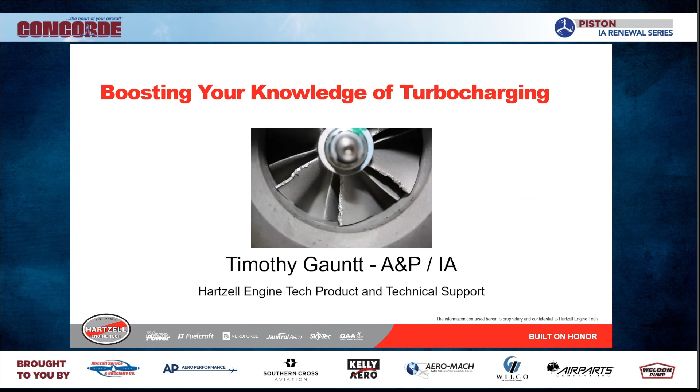My name is Tim Gaunt. I am an A&P IA, and I am part of the Hartzell Engine Tech Product and Technical Support Group.

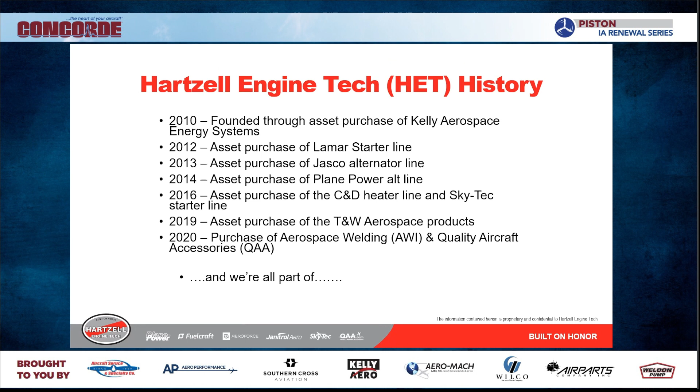A little history on Hartzell Engine Tech. We were founded in 2010 when the parent company for Hartzell Propeller purchased the assets of Kelly Aerospace Energy Systems. Since 2010, we've added several different companies between Lamar, Jasco, Plane Power, and C&D. We also added T&W Aerospace. Then in 2020 we added Aerospace Welding, AWI and AMI, and Quality Aircraft Accessories, located in Tulsa, Oklahoma. We are all part of the new brand of Hartzell Aviation.

We took the company here just at this past Oshkosh, and we went ahead and broke the company into three major divisions: Hartzell Propeller, Hartzell Engine Tech, which is us, and Hartzell Aerospace Welding, all under the Hartzell Aviation banner.

Some of the product lines we actually have at HET include the Aeroforce turbochargers, Plane Power alternators, Sky-Tec starters, Janitrol aero heaters, Fuelcraft fuel pumps, and Quality Aircraft Accessories, which is considered a brand under the HET product line. It can get a little confusing because all of the alternators, no matter what we manufacture, are considered Plane Power. So the days of Prestolite and Ford and Chrysler and all that are gone.

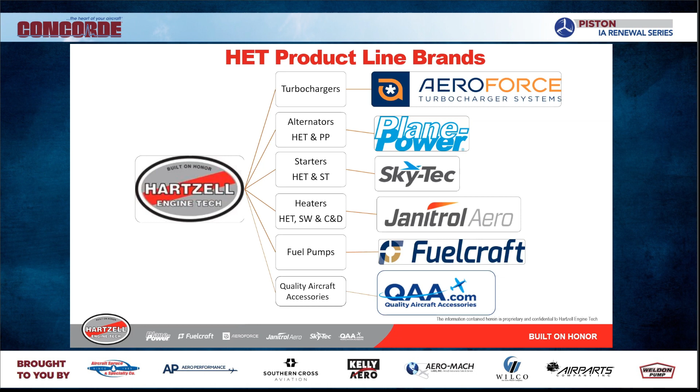Home base is in Montgomery, Alabama, and that is wintertime for us, for some of you that might be out there actually suffering from wintertime. We do have aftermarket and OE support. On the technical support side we have Allen Buffkin, Jacki Gillund, and Seth White. On the sales side we have John Heitland, Rodney Arnold, and Wade Hill. I wanted you all to know that we have technical expertise on our products in that we have 3 A&Ps, 2 IAs, 2 pilots, and 2 retired military, which you know how they are.

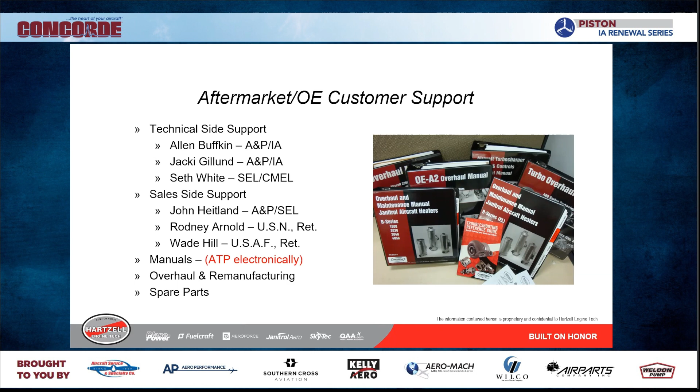All of our manuals that are published are available electronically through Aircraft Technical Publishers. The turbocharger manuals and the valves and control manuals are available through ATP by subscription, electronically. We also have what we call RSFs.

This is a recommended service facility for HET, and it's for all the turbocharger related components. What's good about the RSFs is that they are required to carry product liability insurance, and they are authorized to perform warranty evaluation and repairs. This is important because we'll get a lot of calls from folks that say, I have a turbocharger that's leaking. Well, for those of us who have been dealing with turbochargers for years, we know that there's no true oil seal in any of the 400 series turbochargers, which means they are going to leak.

So you got to be real careful about saying you have a leaking turbocharger. But if that's the way it is, it can be sent into one of our RSFs, and that RSF can take that turbocharger apart, verify there's no problem with materials or workmanship, put it back together, and charge you a nominal fee for that inspection.

If you send it here to the factory, good luck. It's going to be a while before we get to it. If we take it apart and find nothing wrong, warranty is going to be denied and you're going to get the thing back in pieces.

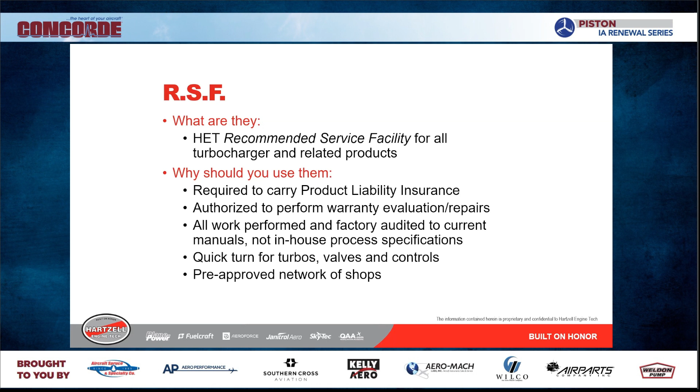Another advantage to an RSF is all the work is performed and factory audited to current manuals. Nobody's using in-house specifications. Pretty quick turn on turbos, valves, and controls. You can work that out with the shop, and they're a pre-approved network of shops.

Those shops are, of course, we have Quality Aircraft Accessories. Obviously, we own them, so that's logical. They're in Tulsa, Oklahoma, and Fort Lauderdale, Florida. We have Aero Recip in Manitoba, Canada. We have Approved Turbo Components down in Vero Beach, Florida, and Main Turbo Systems out in Visalia, California.

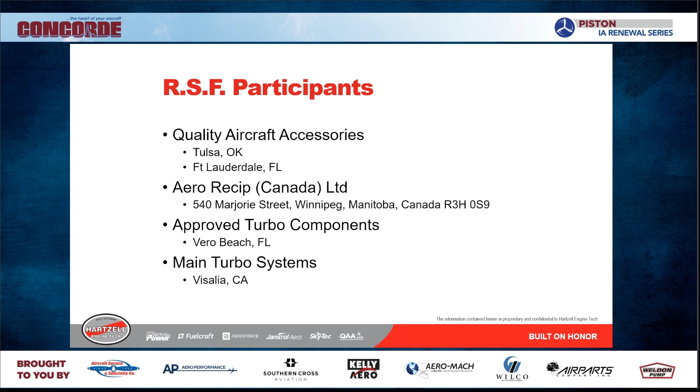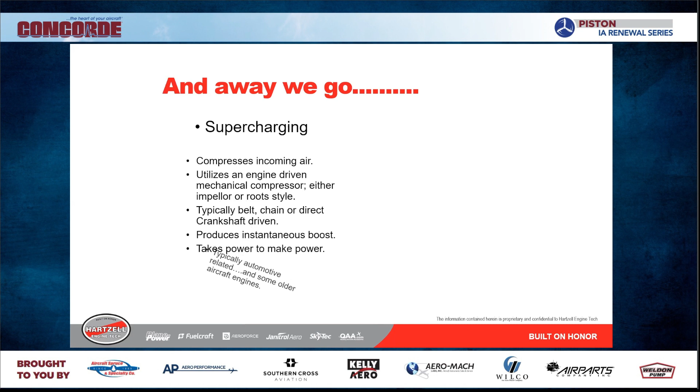All right, away we go. You know, you got two ways of doing this. You've got supercharging and you have turbocharging. Both allow you to push air into the engine more so than what's available on a standard day.

The whole idea is how you're going to get it there and what's the best way for an aircraft to do it. A lot of the old aircraft were supercharged. They did have impellers right on the big radial engines on the back of the crankshaft. They even had it on some of the geared old GO-435s and 480s, which were GSO - geared, supercharged, opposed engines.

But as time went on, the airplanes got smaller. It got harder to make a supercharger that would actually work conveniently. So we went to turbocharging because you got the turbo, you got the exhaust system right there. You can pull the power from that exhaust, extract that heat energy, spin a turbine wheel, which spins a compressor wheel, compress the air coming in and send it on into the engine itself.

So it was kind of free power. It was already there anyway. You already got the exhaust. Think about the efficiency - typical recip engine is about 33 to 35% efficient, which means you're dumping a lot of heat, a lot of exhaust, a lot of energy right out the exhaust pipe. We turbocharge it, probably comes up all the way to 42%. So we still got a lot of heat going overboard, as you all know if you've seen the exhaust.

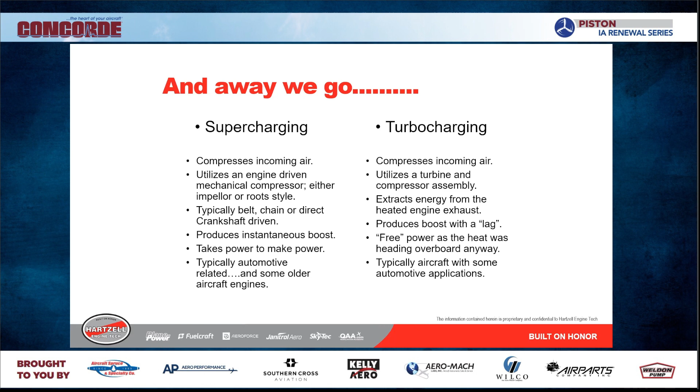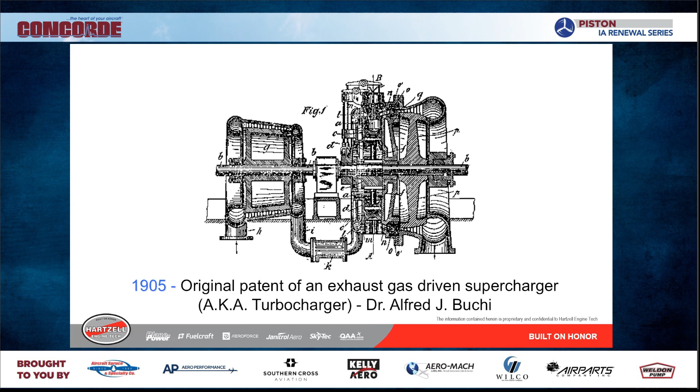Original patent on an exhaust gas driven supercharger, aka a turbocharger, was by Dr. Alfred J. Buchi in 1905. Dr. Buchi was the chief engineer for the Sulzer brothers, which of course is when it was designed.

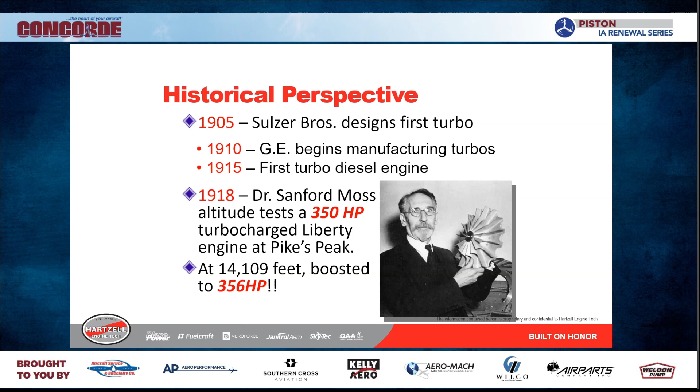GE got involved. The first turbo diesel engine was manufactured in 1915. And in 1918, Dr. Sanford Moss actually took a turbocharger on a Liberty engine, which was rated at sea level at 350 horsepower. He took it up to Pike's Peak and he boosted that engine to 356 horsepower. What that did is it proved that the turbocharging theory was correct - that you could maintain or increase a sea level rated engine's power at altitude, which is the whole basis of what we're doing today.

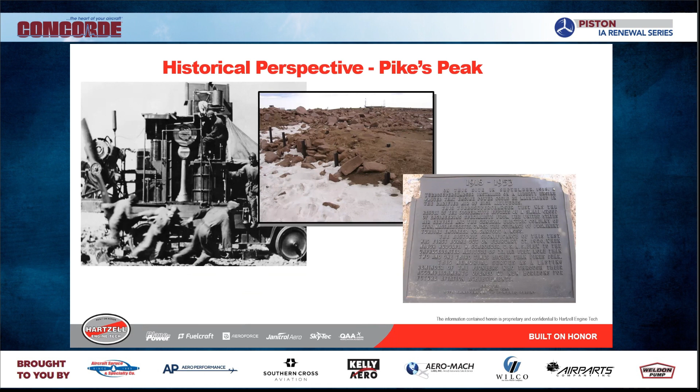Kind of an interesting thing. It talks about the history of it and how we got to the point we were at. This dude, Major Rudolph Schroeder, in 1920, took a LePere biplane - it was a 12-cylinder turbocharged Liberty engine - and he took it up to 33,000 feet.

And when he lost consciousness, the airplane was out of control, and his eyeballs froze as he came down into altitude. Apparently, he recovered to make a beautiful landing to complete the flight.

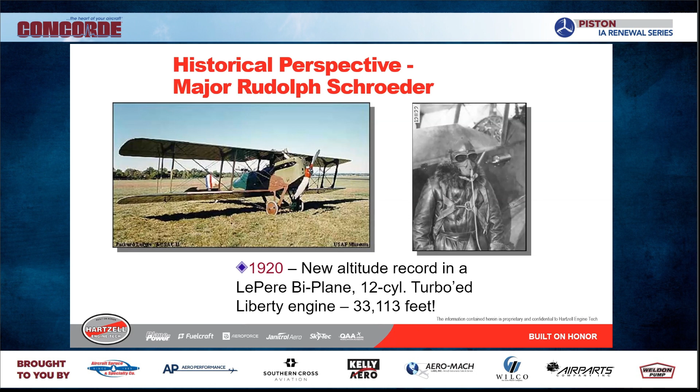Now, if we didn't think there was a lot of sensationalism in the news media today, they were just as rampant as they were back then.

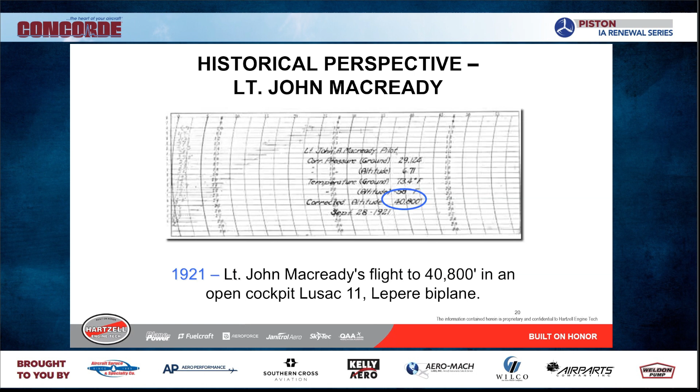And then this other gentleman, Lieutenant John Macready, he actually took the same type of airplane and flew it to 40,800 feet. Gentlemen and ladies, this is not a video game. This is when men were men. So why do we turbocharge an engine?

Well, power diminishes with an increase in altitude, I think about an inch per 1,000 feet. We turbocharge to gain more power and increase engine efficiency, without having to physically enlarge the power plant.

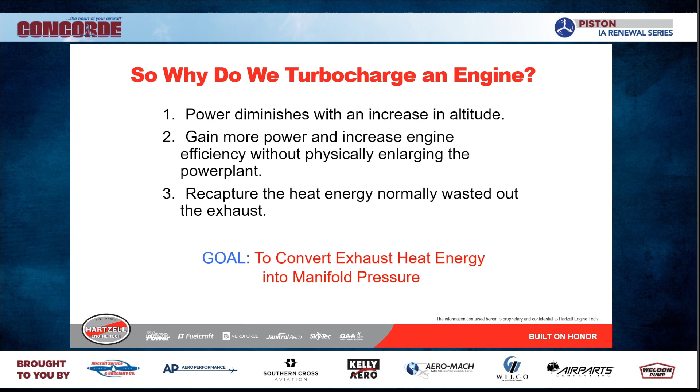We're going to recapture that heat energy normally wasted out the exhaust. Basically, we just want to convert exhaust heat energy into manifold pressure. We can take a little bitty engine and make it think that it's a lot bigger than what it actually is by turbocharging. It pushes more air into the engine.

You've got 5 basic system components: a turbocharger, controller, wastegate, pressure relief valve, and intercooler. The turbocharger is just the air pump. The controller is considered the brains. Now remember, this is not a computerized system.

We saw that it was patented in 1905. In 1905, there were no computers around that I know of anyway, so every one of these is a mechanical, hydromechanical device. They just use different air pressures to determine what the position of things are going to be.

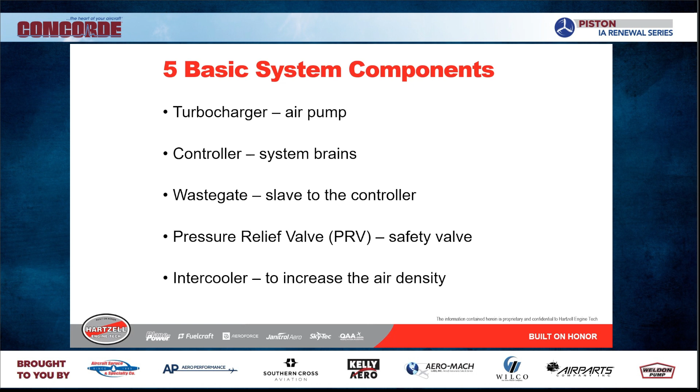So the controller is the brains of the system. The controller controls the wastegate, which is a slave to that controller. The pressure relief valve is nothing more than a safety valve, so you don't blow the engine up. And an intercooler just increases the air density, which we'll talk about in a minute.

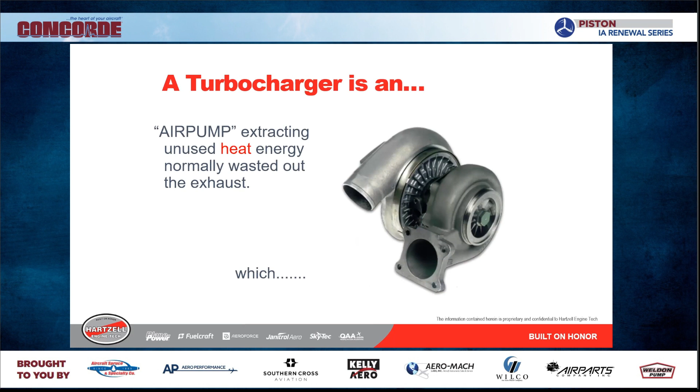So if we go to the turbocharger itself, it's nothing but an air pump. It just extracts unused heat energy, normally wasted out the exhaust. If we look at the way the air is routed and the exhaust is routed through it, you'll see the exhaust coming up through the turbine side, comes around the scroll, turns the compressor wheel from the turbine wheel, sucks air into it, pressurizes it, and sends it out into the upper deck and manifold pressure.

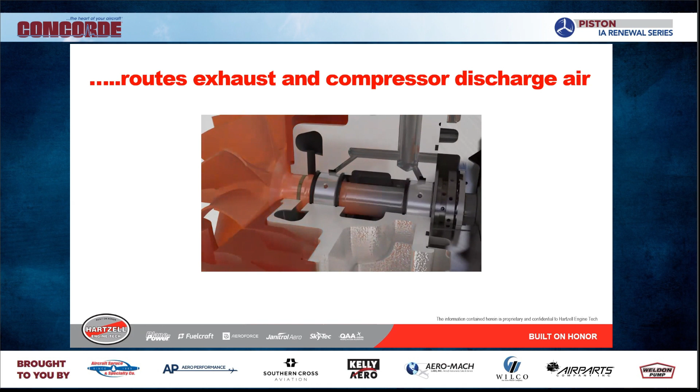Now watch what happens when this thing enlarges. You're going to see the heat signature from the turbo side coming all the way across through that bearing on the left-hand side. That bearing is the one that has the little hole in it. Now, that bearing, if it is not properly lubricated by you shutting off the engine too quickly, is going to coke that oil that's right in that bearing.

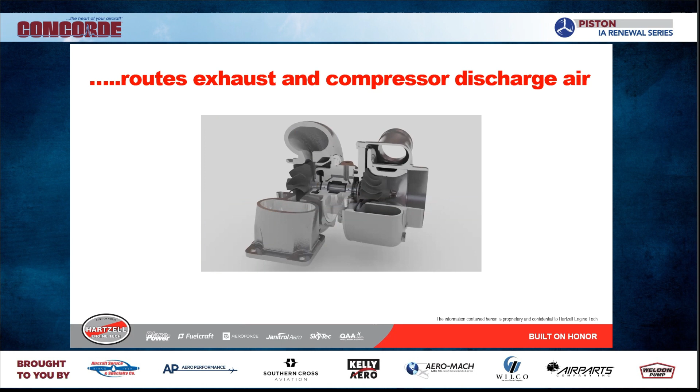And by coking that oil, you're going to squeeze or keep that little piston ring that's in there from actually preventing the oil from going out, because the air pressure won't have anything to push against. And it's going to let you have a leaker on this thing. So it's very important to have proper cool down, which we're going to talk about later.

Cold side materials are aluminum. Basically, the compressor side is going to be aluminum. The hot side or the exhaust side is going to be Inconel or stainless steel. We're going to be looking at temperatures of approximately 1,650 degrees Fahrenheit. And these turbochargers are going to turn up to about 125,000 RPM. Small ones are going to be the 125, larger ones, let's say 90,000 RPM.

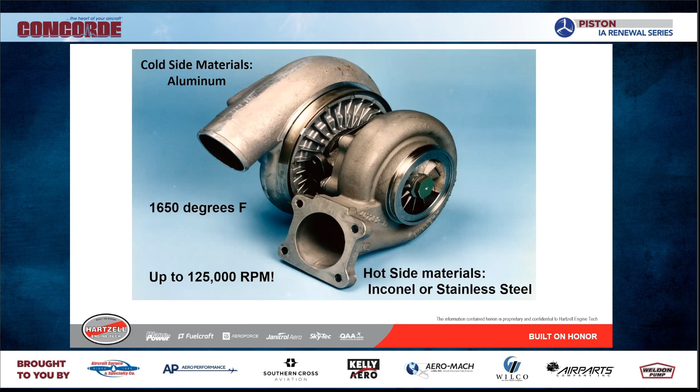Different models of turbochargers: we have the old Rajay style, which is what we consider our CF600 series. The Rajay company, if any of you have ever been involved with them, turbocharged almost anything that existed between airplanes, cars, tractors, boats. It didn't matter. They'd stick a turbocharger on it.

It was easy for them to do because the majority of their systems are what's called a normalized system, in that they are not trying to increase the rated output of the engine. They're just trying to maintain that rated output when they go to altitude. So it wasn't like you had to have a super engine or had to do anything to the engine to put a Rajay on.

The Garrett turbochargers, the TA04s, that'd be something like what's on a Cirrus or a Malibu. The Garrett TE06 style would be more like on a Navajo, and a TH08 would be something like a 421, 414 that has a pressurized cabin, because they pull a little sonic venturi on it to pull your air out, which should show you that you have plenty of air.

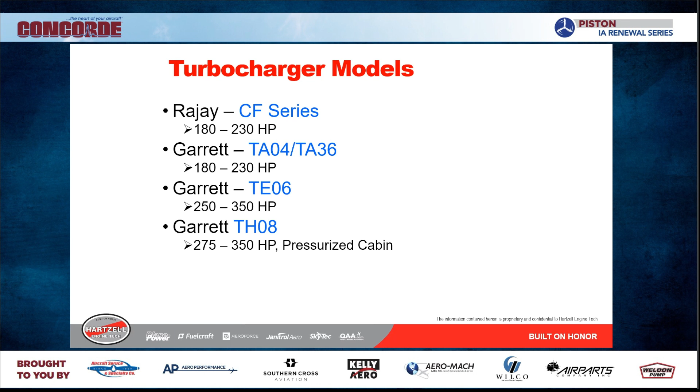You have enough air coming from a turbocharger, not only to keep the engine at whatever it's supposed to be power-wise, but also to pressurize a cabin. So you've got a lot of air coming through this thing.

Turbocharger terminology: boosted, horsepower increase. The best way to look at this is on a normalized engine. If you have a standard day, 29.92 inches, 1013 millibars, 59 degrees Fahrenheit, whatever, that engine's going to give you X horsepower and X manifold pressure. Never going to be exactly 29.92, but for sake of argument, we'll say 29.92.

So a normalized system is going to take that 29.92 rated horsepower and take it up to altitude, whatever the capability of that turbocharger and the engine are. A boosted engine is going to take the 29.92 and boost it. So instead of having 29 inches of manifold pressure, you could have 31, 45 inches of manifold pressure.

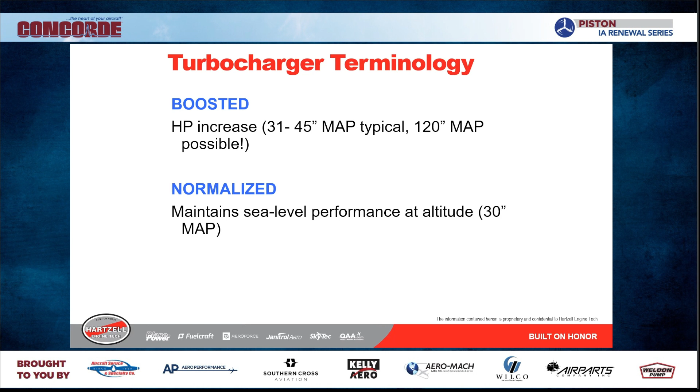Though a lot of the race airplanes and the old warbirds would pull 120 inches of manifold pressure. Think about that, that's 4 times atmospheric. So I don't think we were too concerned there about durability and reliability. It was probably just trying to get somebody, because they were on your butt with a machine gun and you really kind of needed to get out of there.

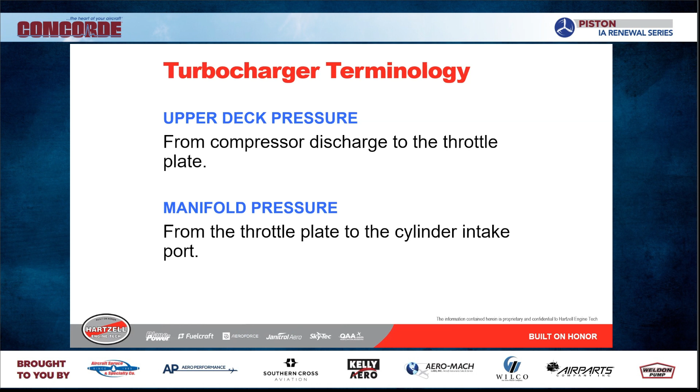Upper deck pressure is physically from the compressor discharge to the throttle plate. Manifold pressure is from the throttle plate to the cylinder intake port. So you kind of split those up. The reason we do that is because the controllers use both of these air pressures to determine the position of the pilot valve in the controller, to position the wastegate to allow a certain amount of air to go over the turbocharger itself.

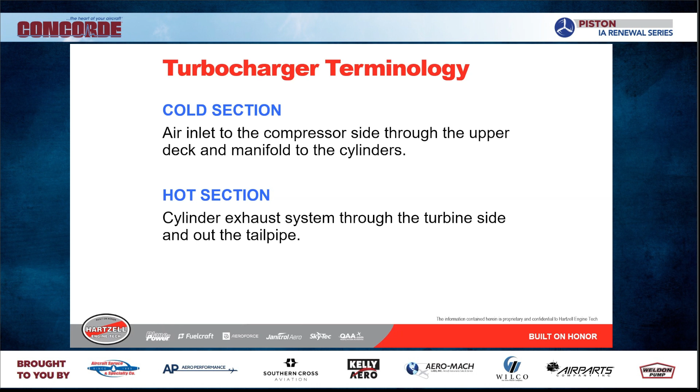Cold section and hot section. Hope you don't need any help with this one, should be pretty obvious. The cold section is on the air inlet side, to the compressor side, through the upper deck and manifold to the cylinders. The hot side is the exhaust. If you have a hard time trying to figure out what the hot side is, just run the engine, go out and stick your hand on the turbocharger. You'll figure out real quick which the hot side is.

So if you're thinking about it, if we said that a turbocharger could rotate at 90,000 RPM, that means the bearings themselves are rotating between 30 and 45,000 RPM. Probably a pretty good reason to keep some oil going through this thing anytime that turbocharger is online.

Piston rings, they use little piston rings, not unlike a cylinder ring. They're a little ring that goes on either side of the shaft, between the shaft itself and the housing and the bearing housing, and they're not oil retention seals. What they're actually used for is the gas pressure from the exhaust side and the gas pressure from the compressor side push in, trying to get into the center housing, into that bearing housing. Well, we don't want those contaminants in there from that exhaust air and that type.

So what we use is these rings. The gas pressures push on these rings and they help seal the gas pressures out, and that's what actually keeps the oil in the center housing itself. That's why you might have a situation sometime where a guy says it's leaking or something like that. It's very possible it could leak because there's nothing there. There's no true seal in a turbocharger to prevent the oil from leaking.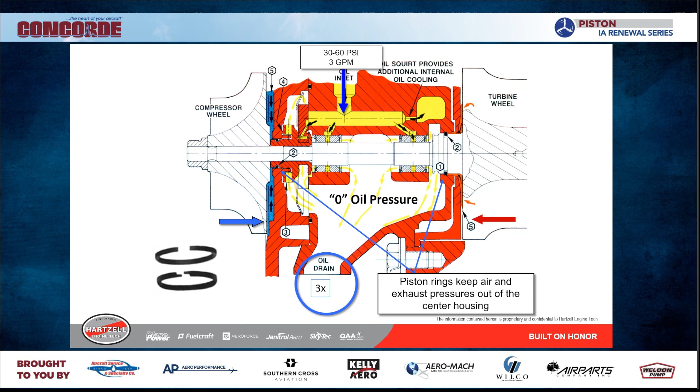We now have a restriction downstream, which is the bearings and the turbine wheel shaft assembly. But once the oil goes through that, there's nothing there. So we have no oil pressure in the bottom of that center housing, which means we have to have a large outlet. Notice the oil drain is about 3 times the size of the oil inlet. And in many cases, we're going to have a scavenge pump attached to make sure we evacuate all the oil out of that center housing, or you will have a leak.

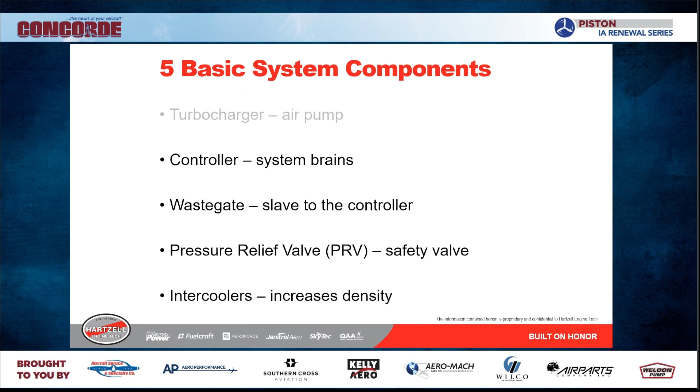Let's go back to our system components. We had the turbocharger, the controller, the wastegate, PRV, and the intercoolers. Turbocharger's gone. Let's talk about the controller.

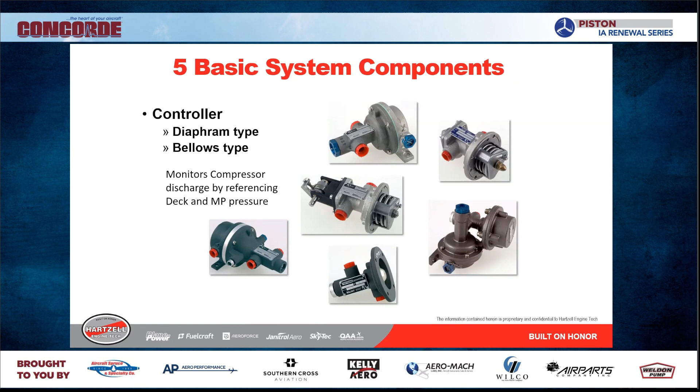Different controllers, there's all kinds of different pictures of them. Remember, the controllers to us as a manufacturer, what we see is what the engine manufacturer, the airframe manufacturer want. They tell us, hey, we want an engine that has this much horsepower. It's going to be a 6-cylinder. We're going to turbocharge it. We want this manifold pressure. What do we need to put on there to give us those parameters? And then we just take the basic components and put them together, whatever would be best for them.

You have different types of controls. You have APCs that only control maximum manifold pressure. VAPCs, which control max manifold pressure and part throttle operation. Density and differential controllers, like you'd see on a Navajo, have the density controlling the maximum and the differential controlling the part throttle. Slope controllers are basically a combination of a density and differential controller all in one.

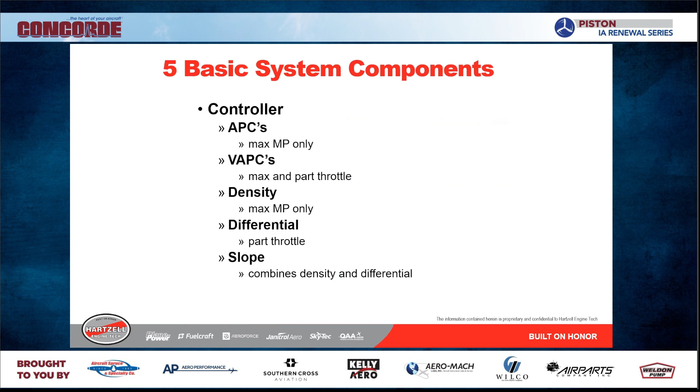Wastegates. Wastegates are just like they say: hydraulic, fixed, poppet, or mechanical. Most of the ones you're going to see on the airplanes are going to be in the picture on the top, the top one there. They're a hydraulic wastegate. They've got a little valve assembly in them. You basically have a hydraulic cylinder that moves that flapper on the inside there to route exhaust into the turbocharger or overboard. Now, the position of that valve is controlled by the controller.

You have a poppet valve in the controller, and what that poppet valve references, say on a slope controller, is upper deck pressure on one side and manifold pressure on the other. And it schedules oil releasing from the wastegate, which allows either the oil pressure to build up in the wastegate or to be released, and the pressure decreases, which allows the valve itself to open.

Fixed wastegates would be something like on the old Senecas with the TSIO 360 engines, where they had a little screw valve inside there, and that little valve, you'd get in there and have to adjust it. Very susceptible to overboosting on cold days. You had to really watch your manifold pressure closely. And then if you get some dummy like me that went to adjust it for the first time and didn't pay attention to anything, it looked like a loose screw, so I just screwed it all the way in. Well, obviously that isn't correct. Obviously there was probably an approved manual out there to tell me how to do that.

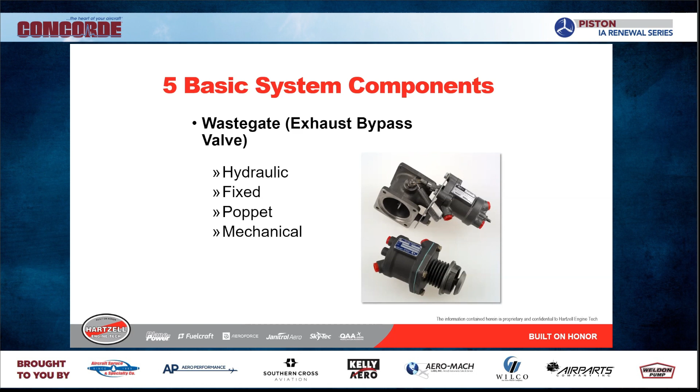Pressure relief valve. Just what it says, it's a fail-safe valve usually set about 2 inches greater than the maximum manifold pressure of the engine. If the manifold pressure exceeds that limit, it'll open up and relieve the pressure in the manifold itself, literally, so you don't blow the engine up.

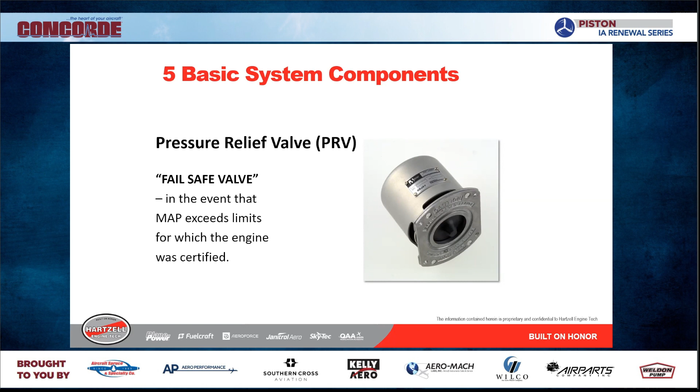It kind of sounds like an old Jake brake on a truck, where it goes pop, pop, pop, pop. You'll hear that thing popping as it opens and closes to maintain that pressure. It should never be the controlling factor. If a pressure relief valve is actually controlling, either there's something wrong with the PRV and it's weak, or there's something wrong with your control system on the turbocharger itself.

And finally, intercoolers. About 10 or 15 years ago, a couple of companies came up with intercooler kits, and they put them on a lot of the 210 series aircraft and the big Bonanzas and things like that. They can't say they're going to give you more power, but what they did say was they could increase your altitude.

Because when you have a turbocharger, the higher you get in altitude, the harder it's having to work to compress the air, and the harder it has to work, the hotter it gets. If you get it too hot and push it into the cylinder, you are looking at detonation. So that's what limits your altitude on most turbocharged engines - nothing to do with what the turbocharger could actually provide, but how much heat is being generated so as not to cause damage to the engine.

So we come up with an intercooler. The intercooler itself cools that air charge going into the cylinder, dropping the temperature after it comes from the compressor, before it goes into the cylinder itself, and you can run at a higher altitude because you don't reach your temperature limits. Remember, it can't change the certification of the engine - what it can do is help it get there.

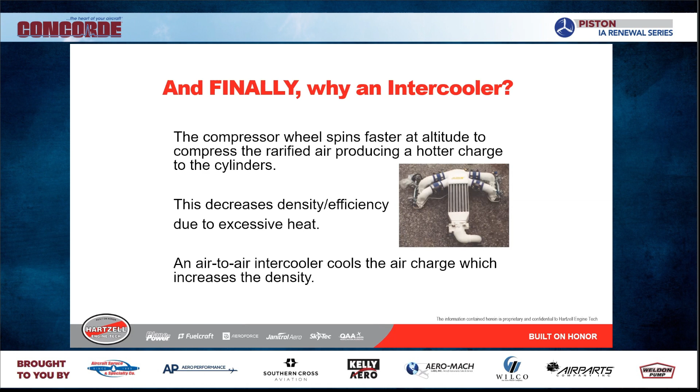The turbocharger is sensitive to insufficient lubrication, contaminated lubricants, foreign object damage, and of course extreme temperatures. Let's take a look at some of those.

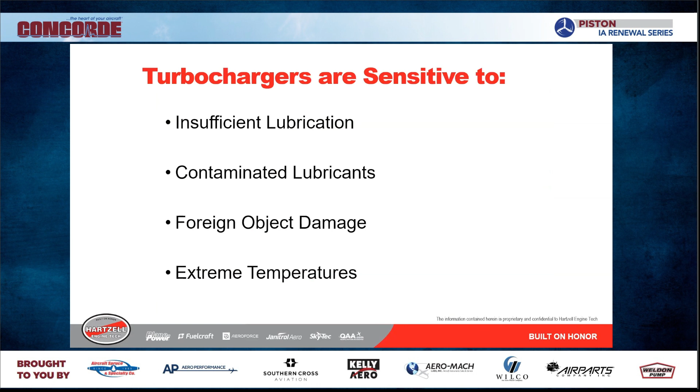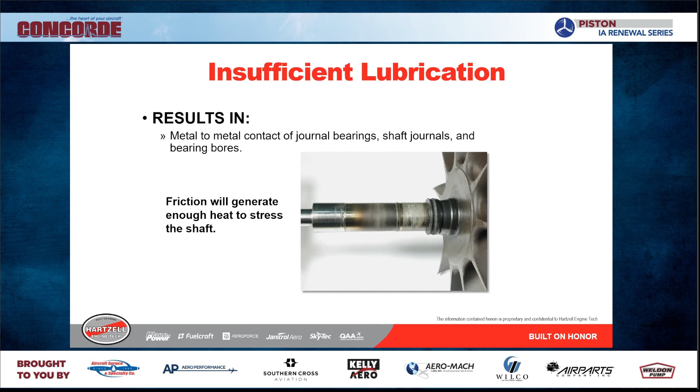So here's insufficient lubrication - you've got enough friction. You can't really tell on this shaft from the picture, but this shaft is actually blue. You can kind of see it on the left-hand side of the shaft itself, but on the right-hand side you see some white that looks like aluminum. That's aluminum galling, where the aluminum material has transferred from the aluminum bearing onto the steel shaft itself. It did that because there was enough friction, created enough heat, and it stressed that portion of the shaft.

When you have insufficient lubrication on a bearing like that, especially a plain aluminum bearing, you're going to tear out some of the material inside of the bearing. When that happens, instead of the bearing spinning freely, you're going to get an orbital motion - whoop, whoop, whoop, whoop. As it turns like that, the shaft's going to start to flex. When the shaft starts to flex, it's going to move the wheels, and as the wheels start to move, they're finally going to contact the housing, and you're going to destroy the turbocharger itself.

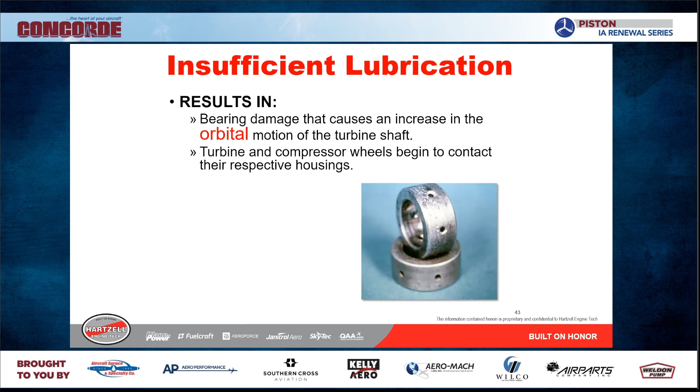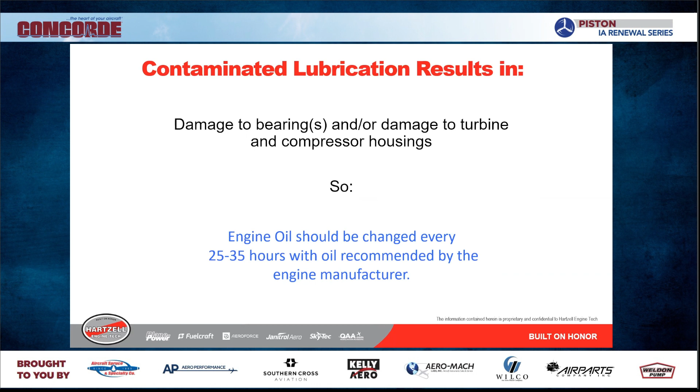Damage to bearings and turbochargers - we recommend oil changes at 25 to 35 hours, and that's what the manufacturers go by. We don't care what kind of oil you use, Phillips or Aeroshell, whatever you like. Whatever's approved by the manufacturers is what we have to approve for the turbocharger, because logically there wouldn't be any other way to do it.

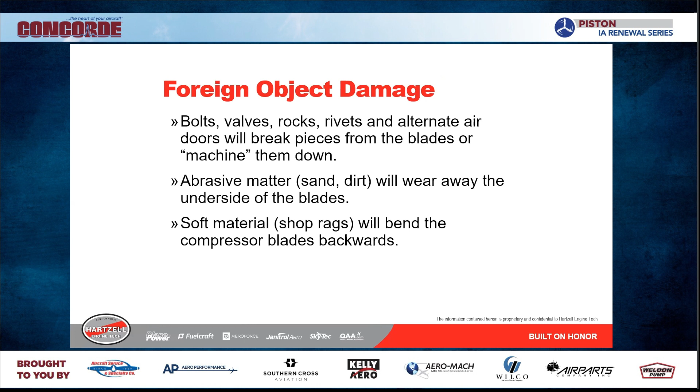Foreign object damage - bolts, valves, rocks, rivets, alternate air doors will break pieces from the blades or machine them down. I have seen everything you see on this screen, I've seen inside a turbocharger. These things come back and they're actually damaged, and the next thing is to determine how that happened. So let's look at a couple.

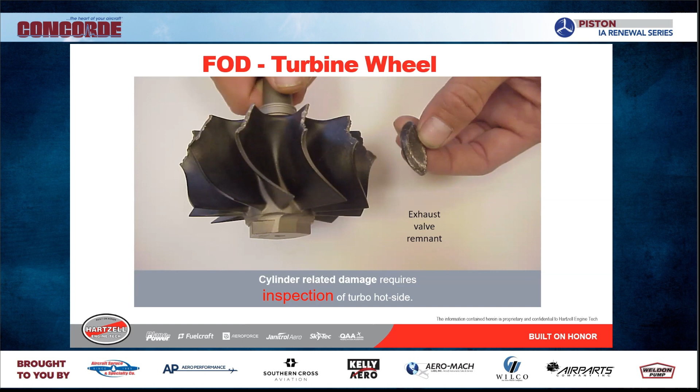Now the next important thing is, if you have something like that, where does all that FOD go? Think about it - that FOD's going up into the upper deck, and maybe if you're lucky it comes out of the compressor and goes into the intercooler and gets captured there. Otherwise, and maybe even so, it goes on into the engine cylinders, and now you've got these pieces of aluminum coming off that wheel bouncing around inside the cylinder. So we have to recommend that anytime you have damage like this on a compressor wheel, you also bore scope the engine to make sure you don't have any internal damage on the engine itself.

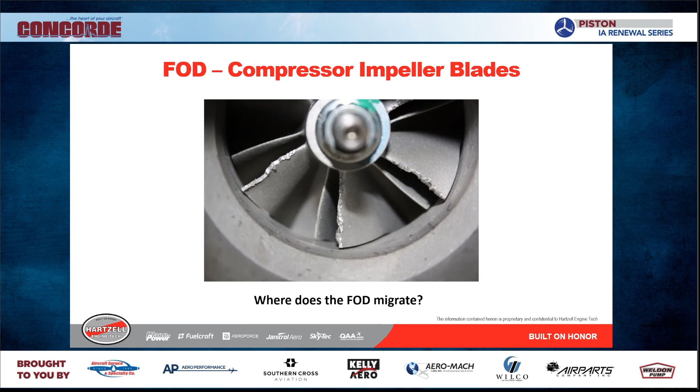Just a side note - the nut that's right in the center of that turbine wheel assembly on the compressor side, we are now slowly changing those nuts over so they are reverse rotation. Because if that thing is turning at 90,000 RPM and something tries to stop that wheel, the wheel is going to stop but the shaft will keep moving, and that would loosen that nut. The nut would come off and go down into the system itself. So by using reverse threads, like an old Chrysler wheel lug, it can't do that anymore.

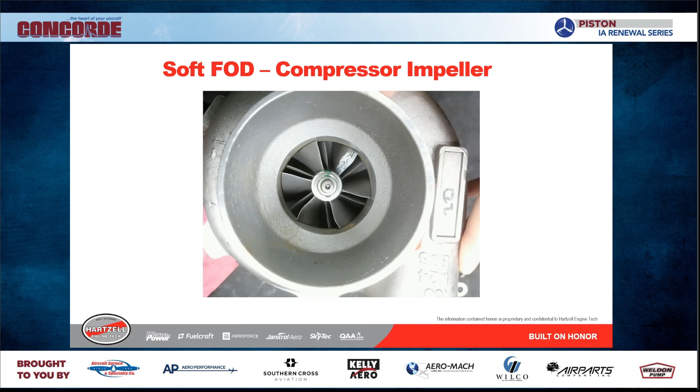Now, you've seen this damage on these compressor wheels - the first one and now this one - there are no repairs on any of this. Once you've bent one or gotten nicks or something in a blade, you are replacing that wheel. You cannot repair it; there's no blending or anything like that that you're allowed to do.

Here's some FOD that was left in here. Notice that yellow cap plug, right in the middle of the screen there. That cap plug basically was put in the oil inlet of the turbocharger center housing to prevent contamination. The theory is you're supposed to take that cap plug out when you put the fitting on. In this case, that did not happen. The cap plug ended up inside the center housing, blocking the oil outlet.

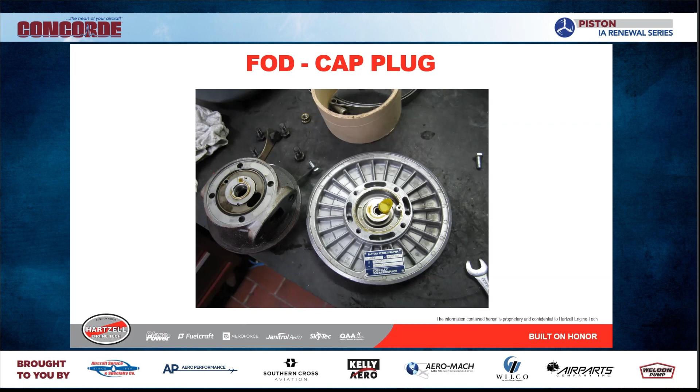When it blocked the oil outlet, it allowed that turbocharger center housing to fill up with oil, which just pushed it overboard because there was nothing there. The piston rings are not going to stop it, and overboard it goes. That's when the tower calls you up and they tell you, hey, you got a white mist coming off the right side of the aircraft. What are your intentions?

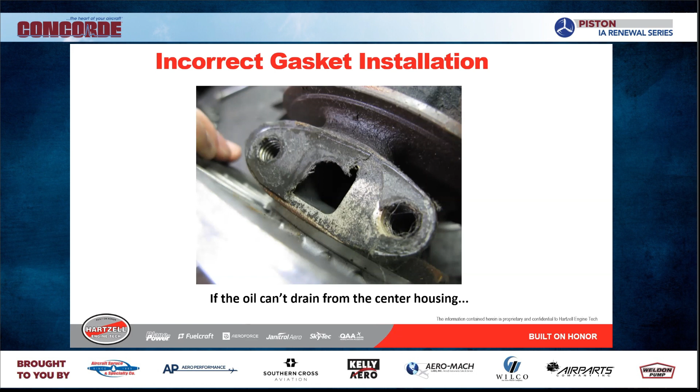Next one, if you can see this picture clearly, and if you notice kind of in the middle of the picture, there's a round section of that gasket. Now, in your mind, take that section and make a circle out of it. And when I see something like that, what I see is an inlet oil gasket was used on the outlet oil side. Again, you restricted the oil flow coming from that center housing, allowed the oil to back up in that center housing, and you were pushing it right out the turbine wheel assembly and into the turbine and compressor housing.

Some general condition stuff.

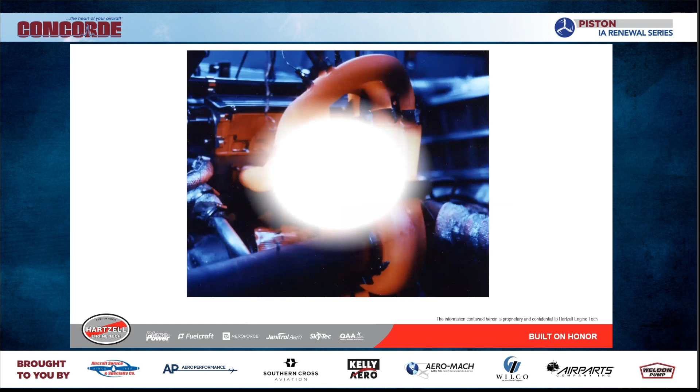All right, that's one of my favorite pictures. I like this picture, and the main reason is because I know it's not an airplane engine. I'll tell you that right off the bat, you don't have to guess at that. But it does show a turbocharger in action, and this is one of the important inspection criteria that you need to be careful of.

Because what happens is, if you look at that thing, it is glowing. It is so hot, it's white, and it's almost translucent. You can almost feel that you could see those blades turning in that turbine side. Seems like you can see right through that housing. That's how hot these things get.

So you got to be careful, because when you're doing your inspections, you got the thing sitting in the shop there, everything uncowled, having your morning coffee, arm propped up on the turbocharger. That is not how it operates. So when you're doing your inspection, you need to make sure all the torques are completed properly. You don't have small cracks in a turbocharger, you have no cracks in a turbocharger. You got to look at it the way it operates, not the way you're seeing it when you're doing the actual inspection. That's sometimes hard for people to get through their head, is this is when it's really operating, and that's what you want to have in your mind when you're inspecting it.

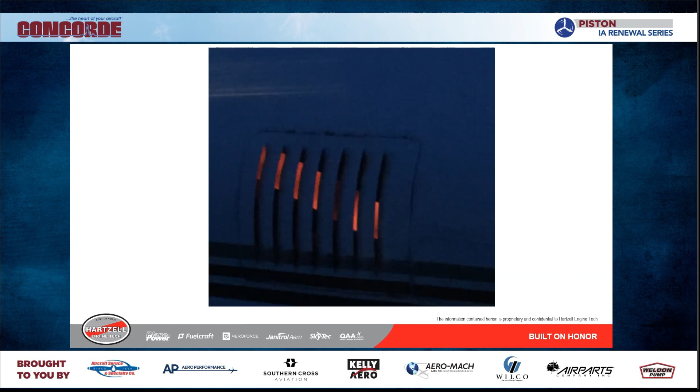General condition, shaft spinning freely. The old Rajay styles do actually have a seal, so I've kind of been lying to you the whole time. On the Rajay style, as compared to the Garrett style, there is a labyrinth, a carbon-faced labyrinth seal in that compressor side. What that does is got a spring on it, and it actually is a true seal because they're trying to keep the oil from going up into the compressor housing. Garrett has just decided that it wasn't there.

There was just no value in that. If you get a little oil in the intake side, who cares? It just pulls it up into the engine, consumes it, and it's gone. So it's really no big deal. But Rajay actually thought it was important, so they did this.

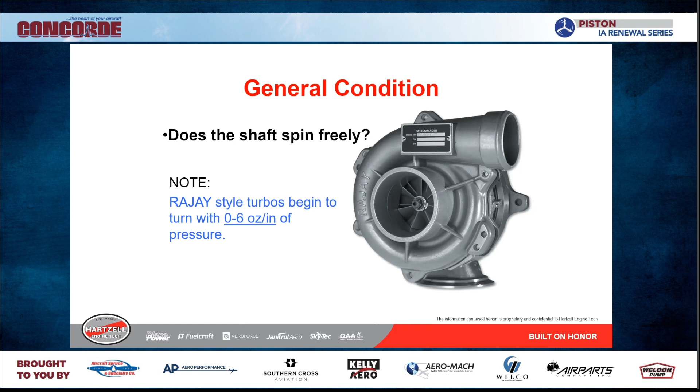Curiosity is we tried using this seal, the same type of seal from the Rajay style, and put them in the Garrett turbochargers, and it didn't work at all. It was absolutely worthless. So we just went back to what the standard was, that, why mess with something that's worked since 1905, which has probably been upgraded a bit since then.

Light source, general condition, you want to see the back of those blades. So you're going to look inside there and you're looking at the back. Don't worry about the compressor side, don't worry about the front of the blades there. Look at the back of the blades. That's where your damage is going to be.

I know it looks like it's hard to get to and hard to see, but if you look carefully, you can actually see the curvature of that blade going up in the back of the turbine. It's on the turbine wheel itself. If you ever see one that's broken, you will never have a problem finding one again, because once you've seen it, you really know what you're looking for then.

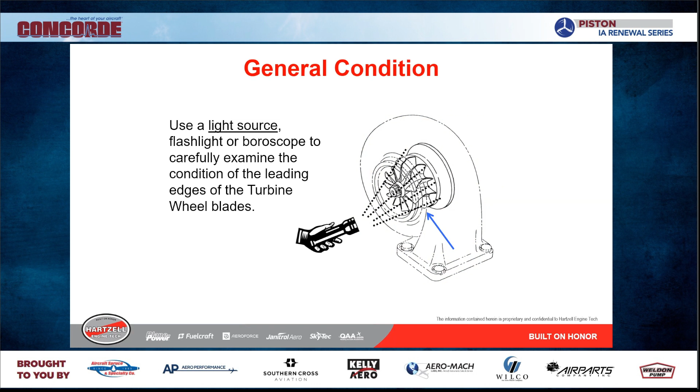Of course, you could always use a borescope. You could take a borescope and run up there too, and you'd see the same thing, maybe even better.

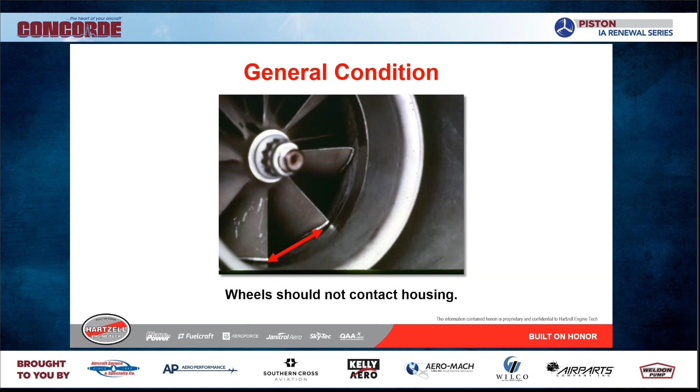Can't have wheels contact in the housing. Turbochargers have blades, obviously, just like this shows, and they are susceptible to the same thing turbine engines are when they talk about creep. A creeping blade is due to over temperature and over speed. What it does is centrifugal force pushes that blade out, and that will allow it to contact the housing. You can see the rub marks on the wheel itself, and you can see the contact marks on the compressor housing.

Radial checks and axial checks, end play checks. So let's go back to the other one. Radial checks are up and down. Basically, you're putting a hand on either side of that turbine wheel assembly, put a hand on the turbine wheel, put a hand on the compressor wheel, and lift up and down. You should have a small amount of movement. There's a bunch of numbers there that tells you what they are for specific turbos, but basically you're going to get in there, and if you can feel a little bit of movement up and down and it doesn't go clank, clank, clank, you are good.

Same thing on the end play or the axial play. You're now going to move it in and out. Now, you can get all these different fancy equipment and stuff like that, but it's been my experience that you are either going to have the correct amount of play, you are going to have a whole bunch of play, which means that you're done anyway, or you're going to have no play.

The no play is the most interesting one, because if there's no play, that tells me that the turbocharger housing and shaft assembly has built up a lot of varnish and soot and stuff inside that housing, and by doing so it's now blocked and won't let anything move freely. However, odds are when everything warms up and everything expands to its normal operating temperature, there won't be a problem with it. But that's the type of thing where you want to tell the guy, tell your customer, hey, you may want to pull this thing down. Let's pull the turbocharger off, send it in, have it cleaned up, and get you back to where you're supposed to be on the clearances.

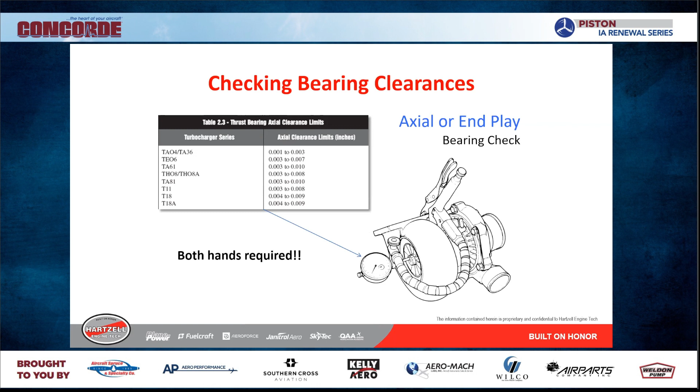He's going to say no because he's cheap, doesn't want to spend the money. Well, down the road, when the turbocharger does fail and doesn't work properly, you will have that moment in time when you can say, I told you so.

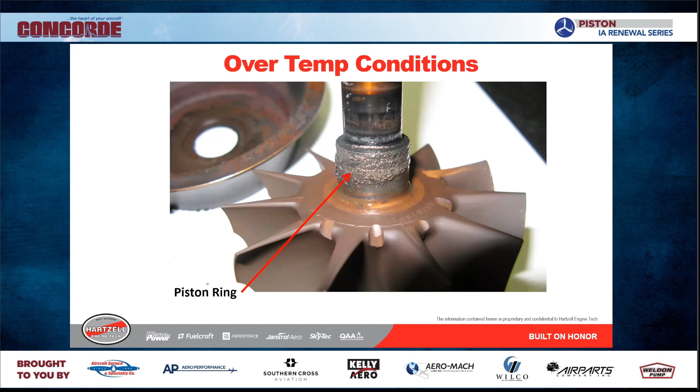Now here's one that had 60 hours on it in 15 months. And this is what it came apart looking like. 60 hours, that's all this thing had on it. And there's your piston ring in there. Look at all the contaminants that are in there. That's a lot of rust. It's a lot of coke, a lot of carbon, a lot of just garbage that's inside that center housing area.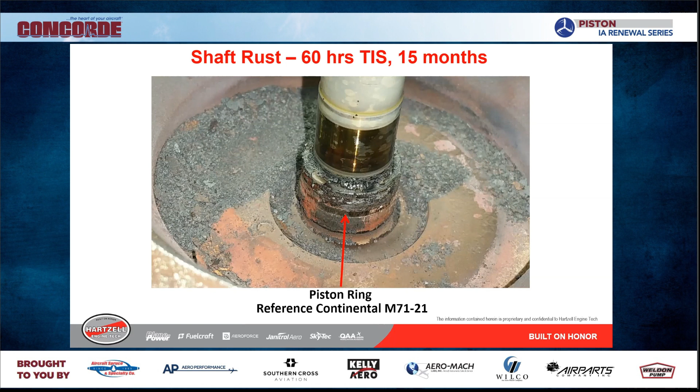This happened that quickly. And Continental has a bulletin, M71-21, written in 1971, that says you need to run these things, especially when they're brand new, to get that coating of varnish and stuff on the shaft, because if you don't, every time you start it, you're grinding that rust off and dumping it inside the turbocharger. That's the bulletin. It's still an active bulletin that was made in 1971.

And this is the one that was actually the beginning of it, from AiResearch. This was written in 1969. Both of these documents are still current, and they could still be used for maintenance because they are the most current data. The interesting thing about this one is if I look at that bulletin and count, looks like I've got 1, 2, 3, 4, 5 paragraphs. They wrote an entire bulletin in 1969 in 5 paragraphs. 5 paragraphs now wouldn't even get us through the legalese that has to be in a service bulletin, as you all know when you try to read them.

Contamination. Think this is contaminated? I don't know, looks like it is to me, considering it won't turn anymore. It probably is. But what is the contamination from? Is it operational? Is it environmental? I'm going to say it's a little bit of both, because remember, you've got a lot of crap coming down from that exhaust that gets into that turbine assembly, and all that mixed with some nice, warm, moist air sitting in South Florida is going to turn that stuff into that crap that's inside there. And eventually it's going to build up enough that it's going to stop the turbocharger from turning.

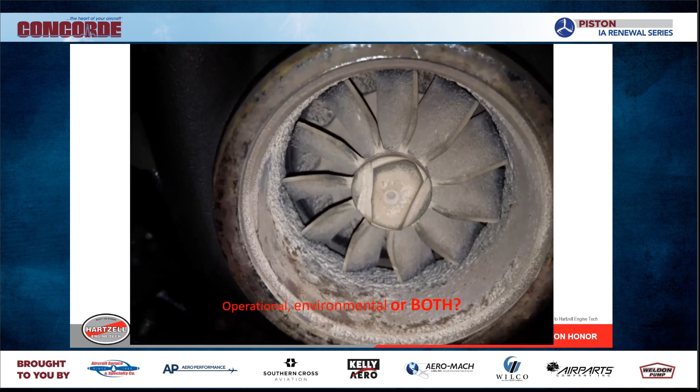And if you want to see something even better, here's your wastegate that came out of that same application. You can't see how it would ever seal to do anything, I wouldn't know. It's got a lot of contamination down inside there.

So this gentleman pulled them off. These came in as cores. It's interesting, when we get cores in our core facility out there, they tear a lot of stuff apart and all, and once in a while they will call me up and say, you have got to come out and see this thing. Well, let me tell you something, if they tell me that, I drop everything and go out and see it, because these guys do these tear downs every single day. And when they see something that they think is interesting, I'm going to go see it. I want to go see what they're actually talking about.

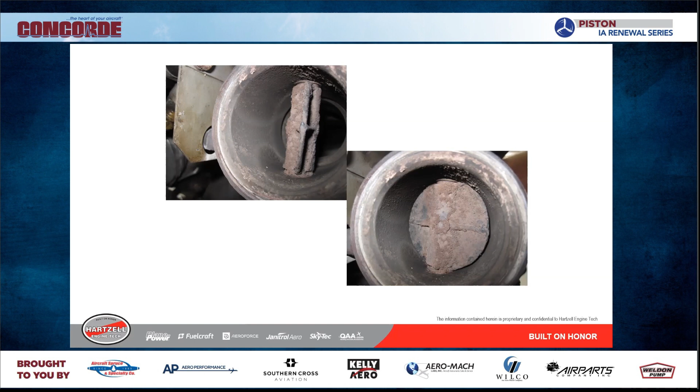Here's a whoops, now we're going to do some whoops. So this gentleman was on an Aerostar, a twin turbo Aerostar, so of course it's multi-engine, 2 turbochargers, one on each side, and one of the engines could not make manifold pressure. So we went through all the different things we could think of and all the things you would try. He got pretty upset, so he went ahead and overhauled the engine because he figured it's got to be the engine causing the problem. Put the turbos back on again, because they were only part-time turbos, 600 hours, something like that. Put the turbos back on, brand new engine, did exactly the same thing. So you can imagine he's about to pull his hair out. It wouldn't operate like the left engine, basically it would pull power but it wouldn't get to its critical altitude.

So where the left engine, say I can't remember which engine, but say the left engine, as he was climbing out, could go on up easily and do his 18,000 feet, the right-hand engine started stumbling at 15,000. It just couldn't maintain it.

So we finally got fed up and just said, hey dude, how about you just send that in to us and we will test that turbocharger for you. But I said, before you do, take all the fittings off, take any brackets off. We don't want any of that stuff coming in, because technically, if you send us any component, alternator, starter, no matter what it is, and you send in an airframe component that's attached to it, we technically cannot send that back to you because we're not authorized, it's not our product.

So we can't give you an 8130, we can't inspect it, we can't do anything. So technically it has to go in the scrap bin. Now, of course, we try to avoid that.

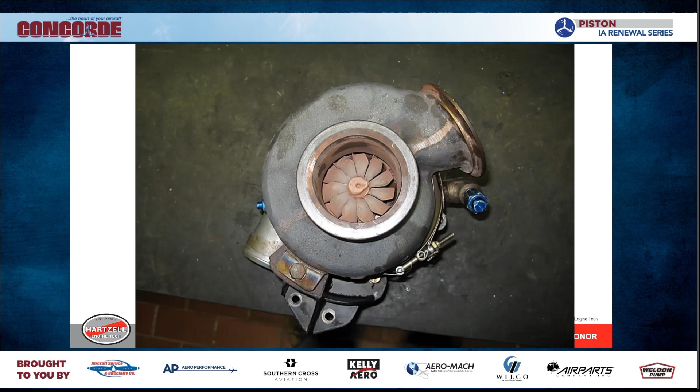Here's another error. This was a turbocharger that came back to us for warranty because it would not torque. It properly would not torque. And if you notice, when you get a turbocharger that we send you in a box, it's basically clocked.

The compressor housing and the turbine housing are clocked for shipping, so they're both probably pointed the same direction, so they go in the box nicely and pack up and all that. Well, you're going to have to go ahead and clock these properly for the installation.

Well, this gentleman, what he did is he took the center housing apart. And what he did is he turned it approximately, I don't know, what do you want to call that, from like 10 o'clock to say 11:30.

And apparently he put it together there, screwed everything together, but it wasn't lined up properly. So then he moved it from approximately that 11:30 position to let's say a 1 o'clock position and screwed it down again. He decided that must have been the place it needed to be, but the problem is he couldn't get torque, because he wasn't putting the fastener into a true hole. He's created this. And of course he sent it back for warranty because everything comes back for warranty that way. And he said he couldn't get torque.

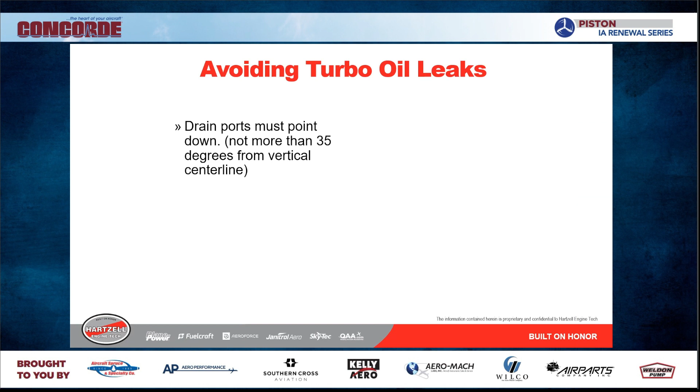Hoses for delamination. I have made a turbocharger hose delaminate on the inside because I cut that inner liner, put it on the turbocharger, had a lack of oil flow, burned up the turbocharger, bought a second turbocharger, put it on, burned up the second turbocharger.

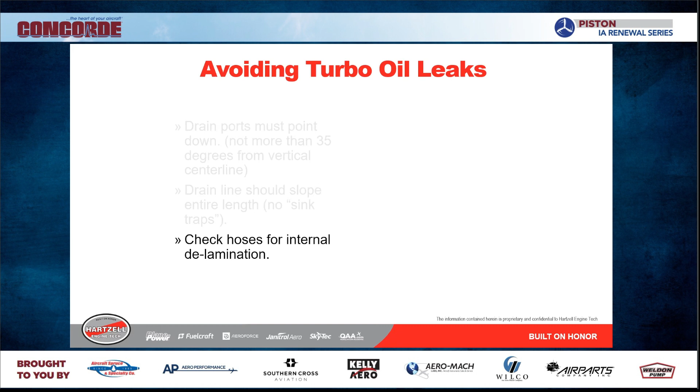But even I'm not that stupid, and I decided there must be something else wrong. We finally found out that I cut the inside of that hose and created a lack of oil flow to it. I don't make hoses anymore, by the way.

Sludge - this is one thing you can check. Look in that center housing. Take the oil outlet of the center housing off, stick your little finger up in there, and see how much crap and sludge has built up inside that housing. That is restricting oil flow.

Now, we do not technically have a way to fix that, but if you go to some of the websites out there, like maybe for Ram Aircraft, they'll tell you they have a process for doing that. We don't have an approved process, but you're not going to hurt anything by doing it. Just always remember you have to pre-lube the turbocharger if you break the oil lines.

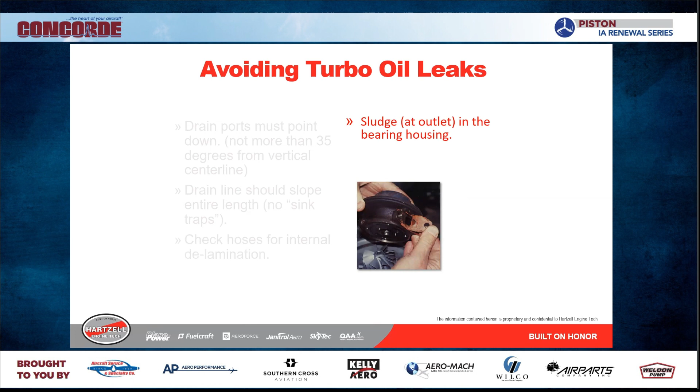And of course, faulty check valves - that's probably the biggest thing going on right now. So watch your Lycoming and Continental installations. Overspeed, overshoot, and overboost - they're exactly what they say they are, so not too much there. Overboost is obviously when you exceed the limits of what the engine was tested and certified for.

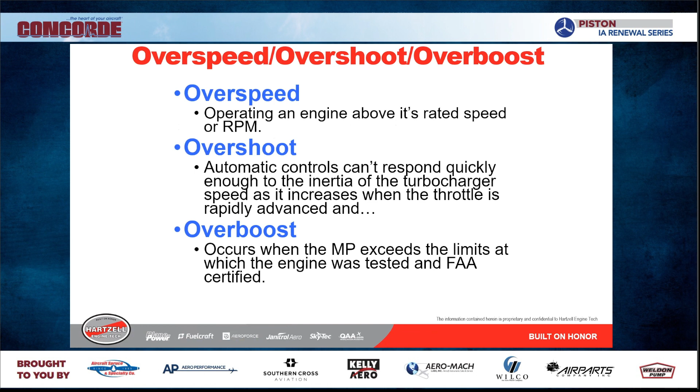Pre-inspection - I mean, you guys know what you're doing out there. You're doing your inspections, following your checklist, which tells you to check these different things on the turbocharger.

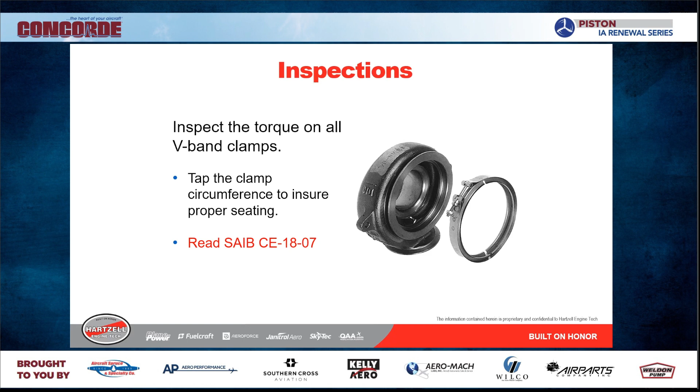Watch your clamps. These V-clamps are probably the biggest thing the feds are looking at right now - they're not being torqued properly. Nine times out of ten, they're over-torqued, and these clamps are cracking. When they crack, the clamp comes apart, housings separate, and you've got fire and hot exhaust gases in the engine compartment.

Cool down - this is one that always starts it with everybody. What's the cool down recommendation? To me, it comes down to what the POH says. If you look at the POH for the airplane, it should tell you how to do this.

Basically, the Cirrus does not, but if you go to the Continental engine manual, it does tell you how to do this. On the 600 series, the Rajays need no cool down because they're aluminum housings, so they're able to dissipate the heat.

If you have a normalized system, it's going to be off the air - the turbocharger hasn't been turning since 3,000 feet, so you're probably in good shape. But you mechanics better watch it, because you're out there running these things up to full static power. You find something wrong, you pull the engine down, shut it off, and that turbocharger's out there humming. So you can cause as much damage as any dumb pilot out there.

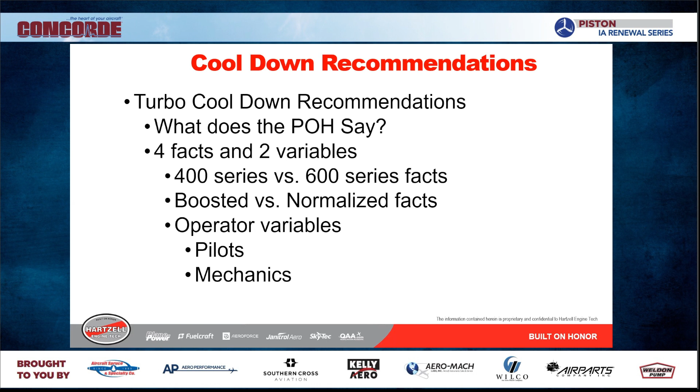We do have different videos - we have different video online testing. It's kind of interesting because you all can take these things and use them with your shop. These probably run 2 to 4 minutes each, and they're a great starting point for you guys to take to your shop, to your folks, and run them through and discuss them - hey, here's what we did on the PDT, how do we do it?

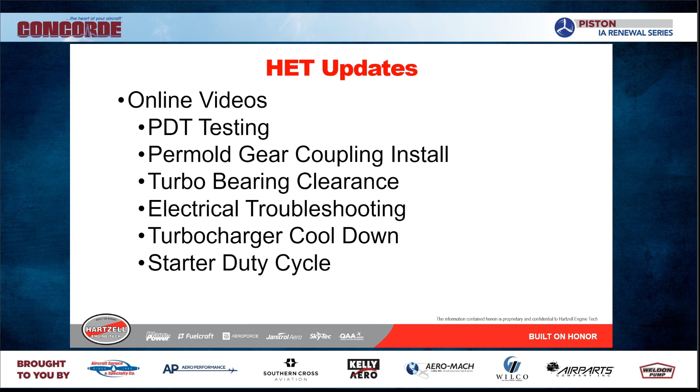It's a great, what do you call it, synergy - where you get everybody together and you're all on the same page on how you're going to handle some of these things. And with that, I want to thank you. It's been a pleasure, and I hope you all gained something of value from the presentation.